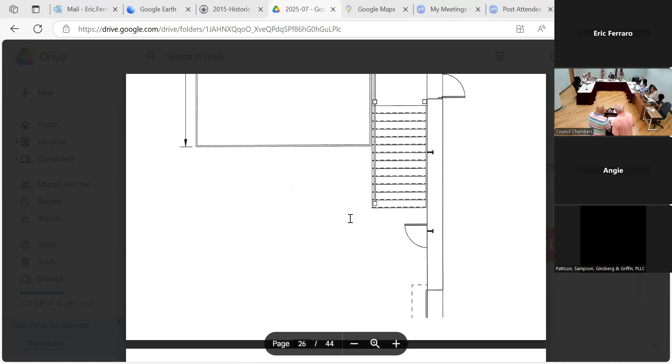When we do the fence, we are going to repair the stairs. We were just discussing coming out 30 feet from the building, like the image we have here, there's cars parked there. Is there potentially some old railroad tracks or something out underneath that? They have been abandoned. They look like they're there, but they don't continue the whole way, they actually end right by the staircase. Matter of fact, they were there and they've been torn up, so they end right in the middle of the staircase.

That begs the question, what kind of utilities are under that? There's some kind of water pipe that we've dealt with the water department about and gotten permission to come over top of the deck. That's the reason the deck, when you come out from the building, needs to step up, because at that point we need clearance according to the water department in case there's ever any kind of problem.

They needed 18 feet in order to get their equipment under there, and that's why there's a step up. I believe there's 3 steps up from the actual first floor elevation. To answer your question, there's a 20-inch water line running directly under. So the city has an easement under this deck. Yes, we provide that.

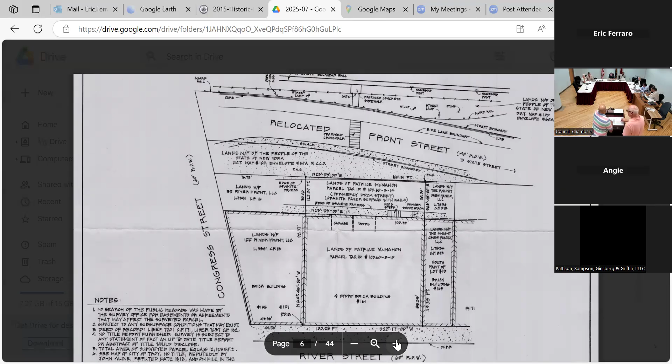So is there any kind of clearance you need coming out 30 feet? And are you going to have parking beyond that, right behind Front Street? Currently there's parking there, but it's not official parking. When we did the environmental assessment, all of that was based upon venue space and requirements for parking and everything, so it's satisfied.

There is some parking there, but mainly it's for bringing in deliveries, things of that nature for the venue space above, so it's not actually parking. Sorry, could I just make sure? The parking requirement has been satisfied prior, when we did the event space. That was some years ago.

When you say venue space, what do you plan on hosting there? We mostly do weddings, bridal showers, things like that. We're not open full-time, although we could be, we are not.

For example, Friday we have a wedding, Sunday we have a bridal shower. Next week we have a wedding and a baby shower. So those are the kind of things we do.

It's an existing business. How many square feet do you have on that first floor, for the venue spaces? It's been so long since I did that. I want to say the total square footage is about 9,000, maybe 9,000 to 10,000 square feet.

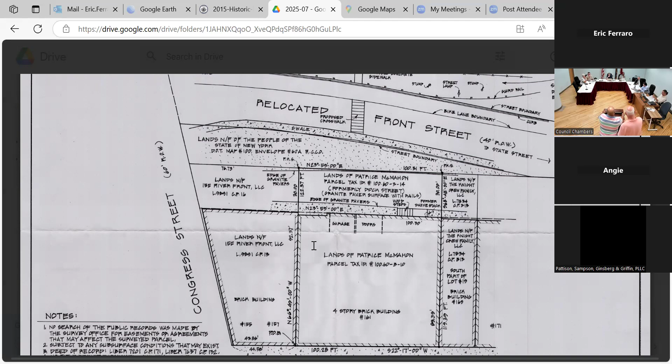I guess the board could inquire of DPU and have them specify in writing what it is they require. I'm not disbelieving you in any respect, but I think it would do well for the board to document its file.

I agree, we need that documentation. But also, looking at the survey, you don't have any easements in front of you from this project at all. We'd like to look at the easements as well.

No, I don't have any easements, and it may just be in the deed itself, and it might be in the form of a restricted use, because it was acquired from the city. You would need to see that. Right, that's why I've asked for that.

What is the distance between ground level and the bottom of this deck? It is 18 feet. Okay, but it's coming out a full 30 feet.

One of the reasons it needs to come out so far is after talking to Carlos and the water people, they were concerned if there was ever a blowout in the pipe, that the water would disturb the foundation and the footing. So we came up with the foundation for the pier had to be a minimum of 5 feet away from the edge of the deck.

So from the edge of the water pipe, instead of building a deck at 20 feet, we needed that additional space to put our piers. Since we were going to go 22 or 24 feet, we figured we might as well go the whole 30 feet, because that would fit our dining tables for weddings better at 30 feet than at 22 feet.

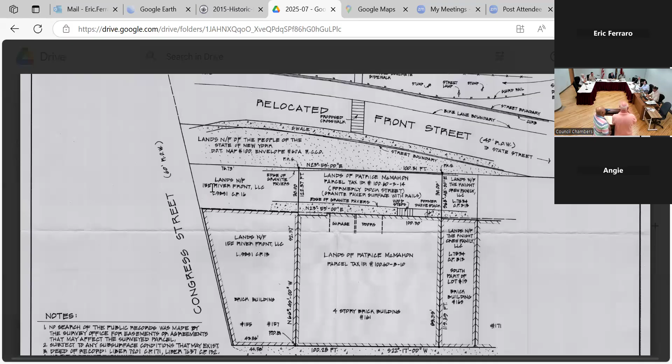So my question was, are you designing this in a way that you don't need braces running between the piers? Yeah, they're clear span. Clear span, correct, because obviously braces would inhibit access - once you put braces there, nobody could ever get in. Right? So do you already have a structural engineer on board on this? We do, and you'll have stamped plans for that.

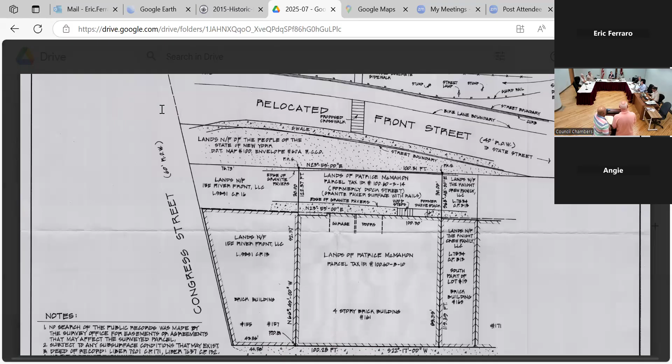Do you know what the approach for soils is gonna be? I'm just saying you're supporting this thing on like 4 piers, but I don't know if... So we're planning on having big footings. We're not looking at little 6-inch sonotubes to hold this stuff. Well, the soil conditions back there - I did that a long time ago. Basically you've got sandy loam back in that area, and it's more than adequate to support the weight.

And we can get an engineering report on that. Would you like to see a soils report included with it? If you have a soils report, yeah, that'd be great. And once again, the piers will be a minimum of 5 feet away from the water line - they're gonna be more than 10 feet away from the water.

Are there any setback issues we have to deal with from those piers to their property line? No. Okay, so I think we're good.

We wanted him to see those documents - the overlays, the easement, new survey, overlays, what we're doing with the water, and so you can show us. And as a board, we have to determine the status of SEQR here.

So we have to make a motion about it being unlisted. It's unlisted, so I need a motion. I'll make a motion that we declare this a SEQR unlisted. Any second? I second that. Any discussion? All in favor, say aye. Aye. Aye. It's 4-0.

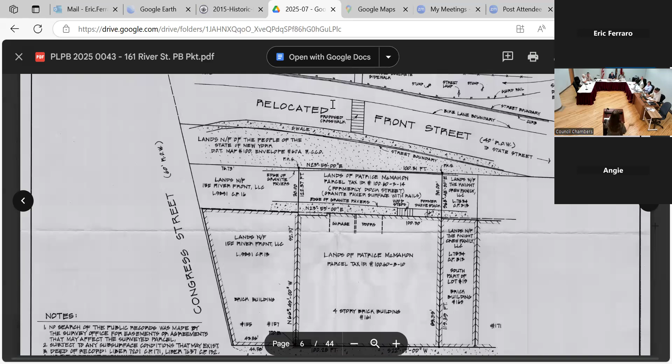Do you know what the state will be requiring of you? Yes, we already passed our fire inspection. Are you talking about OCFS? Yes, we just recently had our fire inspector come out. We passed with flying colors, no issues on their end. We have our next OCFS visit on July 27th or 29th, whatever that Tuesday is. I will be conducting that with OCFS, and that's just their final walkthrough to get us licensed. But on their end, we are good to go.

So you're doing nothing to the exterior of the building, correct? Nothing to sidewalks, nothing like that, nothing to the interior of the building? Nope. So what we're doing is really changing older kids for younger kids? Pretty much, yeah, the Sacred Heart School had closed, so we are taking over their classrooms. That is all we're doing on our end. We are not adding any addition to it of any sort.

Now, are the trips going to be less or more? Now it's like you drop your kids off at daycare, pick them up later in the day, where it used to be buses, or what happened? No, Sacred Heart, there was no buses unless they were coming from Troy City School District, but it was a private school, so we had no affiliation with that. We do still have Troy City School District bringing older kids because our daycare license will be able to hold up to 12 years old. We are in contract with Troy City School District for universal pre-K, which is why we need the daycare center license.

So the impact on the community isn't going to really change from when it was actually operating at Sacred Heart School? No. If anything, is the impact less or more? Probably less because there won't be as many. Because the kids are smaller? Yeah, no, we'll still have the school age buses coming to drop off. Other than that, parents will be dropping off in the morning and picking up in the afternoon.

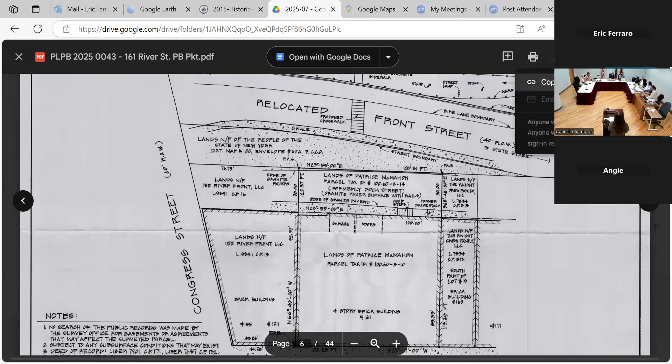Is this part of TSO? Yes, I know the owners, but they couldn't be here today. They sent me, Thomas, Shamika, and Lynette. Correct, correct. Any other questions? Yeah, why is it before us if they're not changing anything? Because the change of use requires it, anytime it's a school or church, I believe. Thank you.

All right, so in order for us to go forward, we have to determine SEQR. I believe this is type 2, is that correct? That's correct. So we need a motion to determine that this is a type 2 SEQR application. I make a motion that we do it as a type 2 application for SEQR. I second that motion. Any discussion?

All in favor, say aye. Aye, aye, aye. Motion passes 4-0. So no further environmental review is required. Right, you're good there, that's it.

Is there anything anybody else needs for this application? I don't think so, they're keeping nothing changed. Yeah, nothing's kind of changed, just the license. If there's a motion to declare the application complete. I make a motion to declare the application complete. I'll second it. All in favor, say aye. Aye, passes 4-0. And then do we need to schedule a hearing?